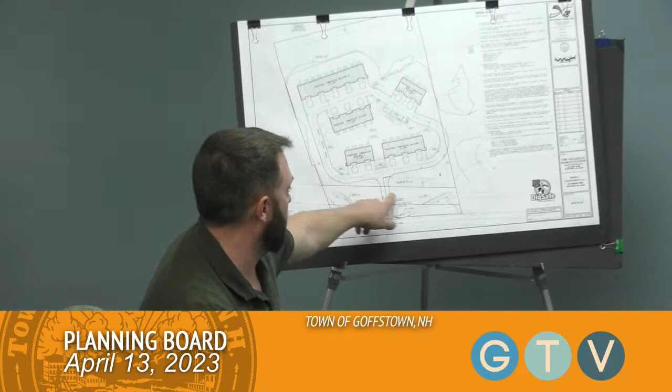It follows right along the side of the existing rail trail. It's a fairly large pipe, 22-inch or 24-inch. There's some debate as to what exactly it is, but we have it measured, and we have the exact inverts on each side, so we know exactly where it is in the ground. This driveway, as it comes in, right now there's an existing driveway to an existing single-family home on the property, and we're in relatively the same vicinity of where we're crossing.

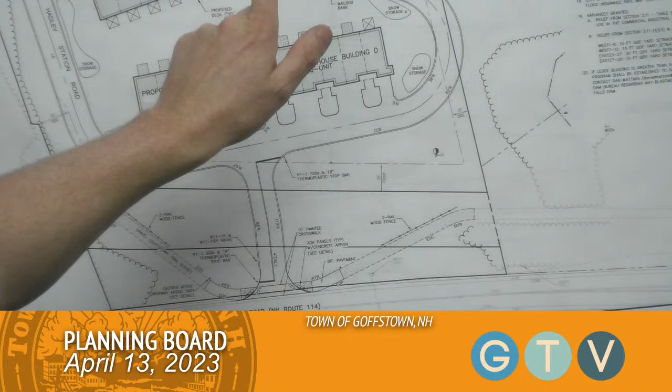However, it doesn't have a platform at the entrance as you typically like to see when approaching a main road, and it is aggressive as it comes up. It comes up quite aggressively, then goes flat across the rail trail, and then continues to climb up into the site. We can't have that transition mid-grade, so we had to make some adjustments.

So what we did is we evaluated the crossing to see what could be done. Just to give a little narrative of where we came from.

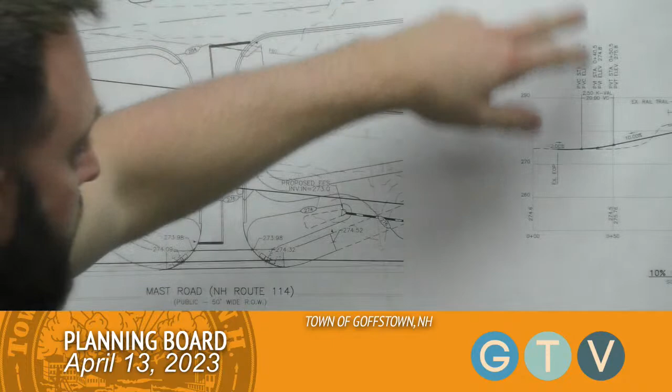What we have here is our proposed access, with two separate road profiles. We have a road profile with a platform at the entrance meeting DOT specifications, and then an 8% grade as required by your design regulations. And then we have one at 10%.

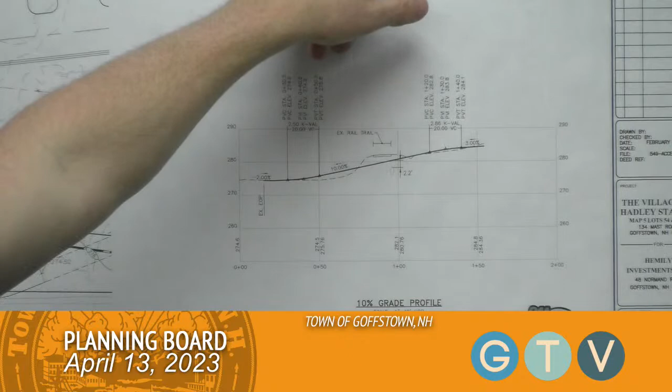What you'll find is that at the most constricting point, since it's a crowned road, at the far edges of the road, at 8% we only have 1.38 feet of cover over the pipe, which is fairly shallow. At 10%, it makes a pretty drastic difference, bumping that worst case scenario to over 2.2 feet.

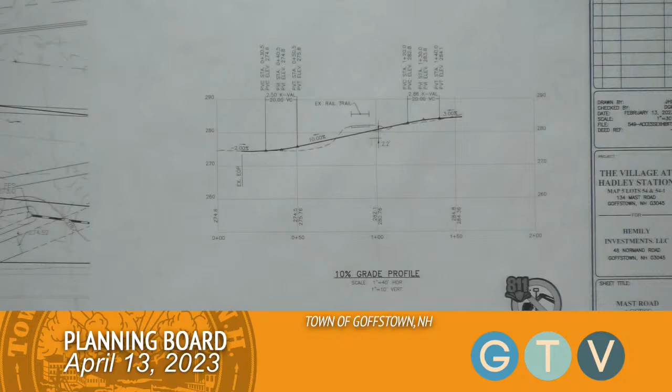What that allows us to do, and this was coordinated with the Sewer Commission and their third-party reviewer, we've come up with a proposal we feel is a safe alternative for allowing that reduced cover. We're not as concerned about the pipe freezing or anything - it's not a cover issue for that reason. We just don't want damage to the pipe.

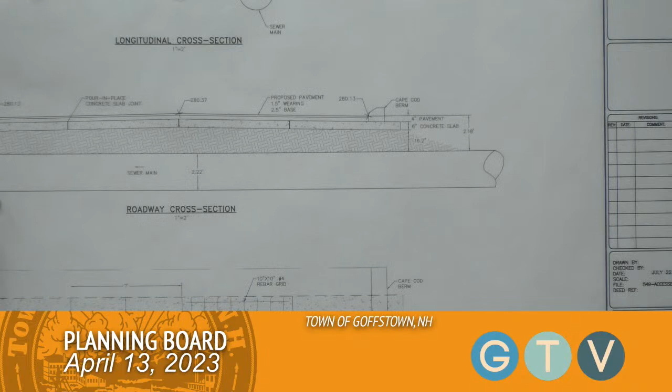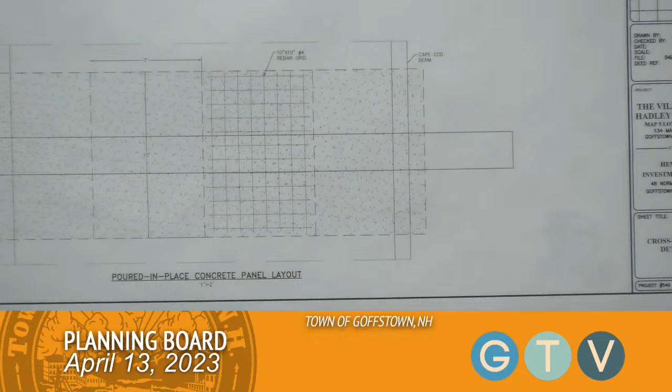So what we're proposing is a concrete slab placed over the crossing area. In layout view, there would be panels of concrete placed on that soil to span where the crossing is and distribute any point load that may come from a truck or anything driving up the driveway, so it doesn't create point impacts along the sewer line.

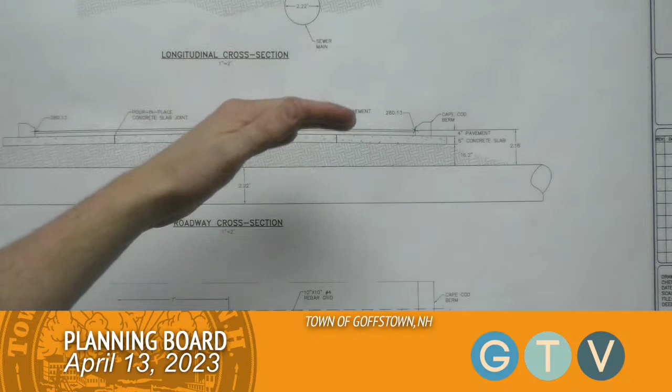At 10%, it allows us enough room to still keep some native soil - roughly 16 inches at the worst case, and upwards of 1.5 feet in better cases along that crossing - and have a 6-inch slab of H20 loaded concrete to span that area.

In reviewing this, we asked could it be done at 8%? I guess potentially, but you'd have a very, very small amount of soil between the concrete and not much room for error. So our thought was that 10% would be a much better design for the crossing.

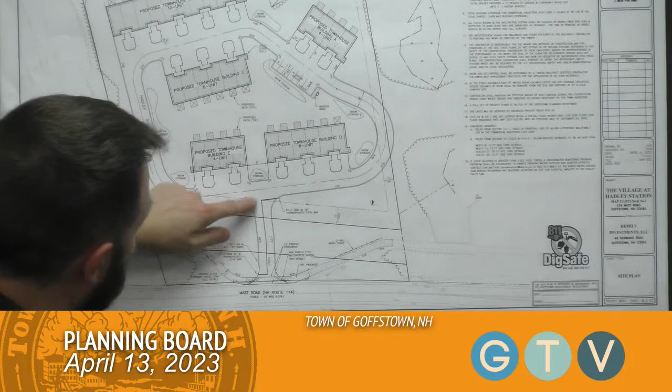We recognized that it was only a small section of the road, about 70 feet of the driveway entrance, because you have transitional curves here. So we're talking about a 10% section that's very small section of the drive. There's no 10% sections elsewhere within the project, nothing more than 8% anywhere inside the project itself.

Just to touch on the rail trail, what we proposed is, instead of trying to cross mid-block where we would be, even at 8%, even under your requirements, that wouldn't meet the ADA cross slope, we brought that connection down to the safest point to cross, which is the intersection of Mast Road and the driveway, and did that in a gradual manner.

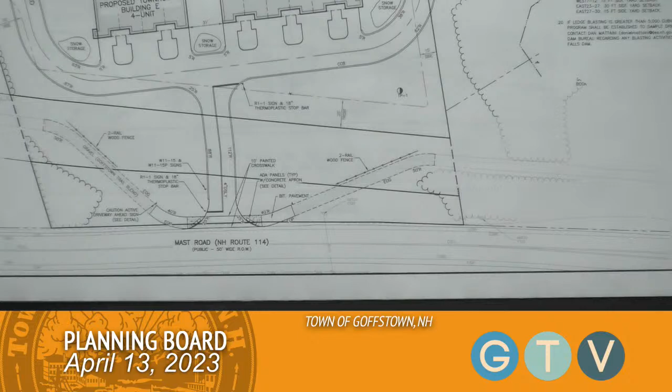This is with feedback from Rail Trail and the Recreation Department and with Scott. And this is fully ADA compliant.

We're doing some voluntary items in addition to what they typically have, which would be extending some pavement so there's a clear transition that you're approaching an intersection from a safety standpoint. This would be a stop condition, striped like a sidewalk or crosswalk, so we felt it was a good option.

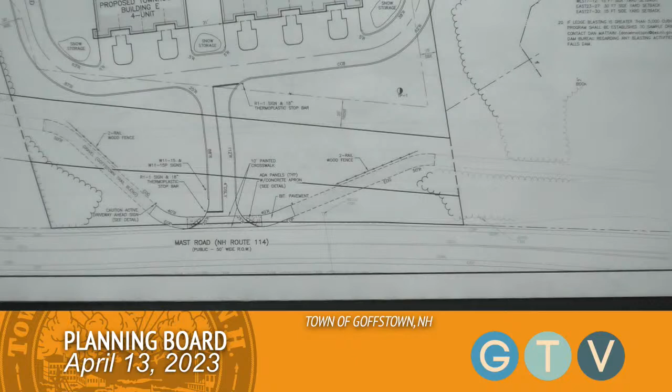So with that being said, the only other item was, as Joanne mentioned, fire - is there any issue from a 10% grade from a fire standpoint? They have no issue with the 10% on the face of it.

However, they want to make sure there are no transitional problems as it transitions from 10 to 2 or whatever. Some of you may recall on the board we had the same question when we looked at Factory Street for an emergency access. That was more extreme, a 16% grade, and we still had it working without an issue with the fire department, but we wanted to make sure we checked that.

So we did a couple graphics for Lieutenant Connor that showed the road, or their biggest engine in profile, as it came down at the tightest points of where it transitioned from 10%.

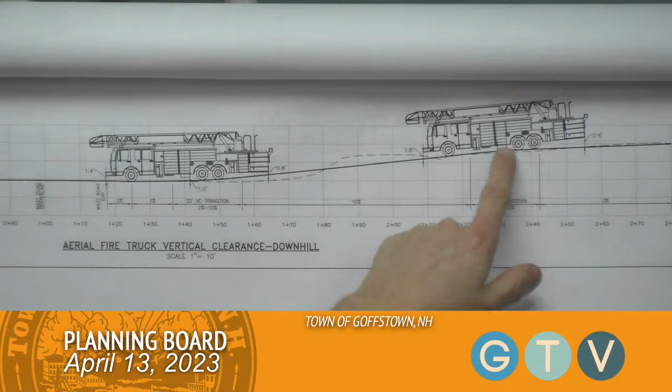You can see 10%, although it sounds aggressive, really isn't that much different at the end of the day. You can see there's no bottoming out issues coming through. Lieutenant Connor has reviewed this over the last couple of weeks and provided an email to Joanne saying he had no issue with the access.

So what we're here for, very specifically, is we recognize you can't act on this application in any more official capacity. We haven't even technically been accepted as complete because we were revising the plan to be accepted. But our goal was, given it was a significant design change considering we have the Tetro Drive access almost completely designed and we're pivoting to this revised access, we wanted to make sure there wasn't anything we were missing that the board members had concerns about.

We were hoping to get some type of a straw poll, an informal vote, or at least hear any concerns you may have with this access, because if you don't have any concerns, we would come back with full design plans with this as the access, recognizing there would be general support for a 10% grade waiver just for this section.

Just so the board's aware, I know this application has been continued a number of times. What we were thinking would be appropriate is, if the board's inclined to support the waiver, we would ask to be continued, but not to a date certain, and we would request that we re-notify the abutters of when we came back.

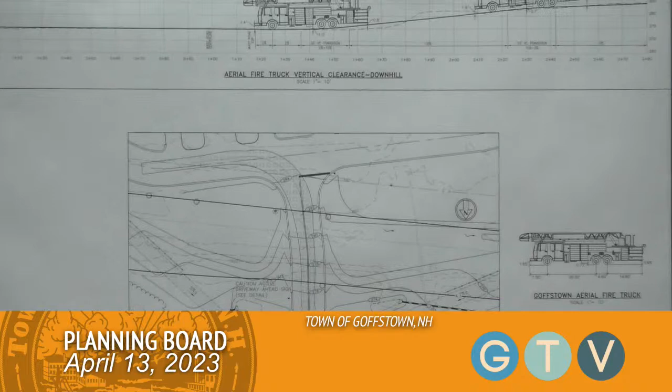What that will do is, I mean, we hope to be done in 30 days. I just don't want to have to come back and keep pushing abutters forward if anybody's watching. I'd like to be able to work with Scott on the revised plans, get him good before we came back. So that would be our intent, but we'd like to hear what the board's thoughts are on the access.

David, could you please enlighten everyone as to what the sewer commissioners were thinking about the cover issue? Either one of us can do it, but I'll have you do it.

Doug showed five panels of concrete over the sewer line, and the sewer commission approved that concept. We had your engineering plans reviewed by our consultant with the sewer department, and he concurred that the strength of the concrete was adequate to disperse the weight. We also thought the 10% grade was a better plan because it provided more cover over the sewer line.

For those of you who don't know what the sewer line is, it is the interceptor line, the main line that pumps all the wastewater from the village to Manchester. So if that line was ever damaged or put out of service, we would have a big problem in Goffstown.

Joanne's rationale here, the reason for the change, is to allow the sewer pipe to remain at the height shown. We have no choice. That entire pipe, for a half-mile long, is gravity fed, so there's no moving the elevation of the sewer line. It's all set up on a grade. Just so everybody knows, the sewer commission was on board with the presentation.

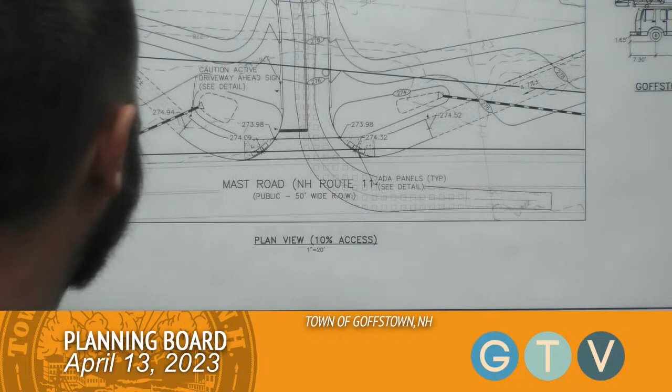So we're at 2% all the way down into the low point, which is past the rail trail walk. We're actually coming down into the site for a fair amount before coming back up. So we're down at 2% here, then transitioning back up, and then we have a 20-foot curve which goes from 2% to 10%.

So we don't have it as 100 feet, which is something I should double check in the regulations. I don't think we ever had, or really could have, a 100-foot platform, and I don't know if that's just for standard public town roadways, or if it would pertain to a private site driveway. Well, it is a roadway design standard throughout because it's multifamily, so you would have to conform.

So where are we in our development regulations? What page are we? Page 44, the road design standards. So the maximum grade within 100 feet of the intersection is 2%.

So based on that, waiving it to be 10%... I think what we would ask for the waiver, and the way I would couch that, is that those standards, and there's many of them in that section, regarding centerline curves, are really intended for a town roadway standard, for a publicly accepted road. I recognize the regulations don't differentiate for a private road.

Joanne and I talked about this, and I don't disagree with you, Joanne, but I look at this as a site driveway. However, the regulations define a driveway as a residential driveway of 3 or fewer units. So the only other definition would be roadway, but there really should be something in between a residential driveway 12 feet wide and a town road.

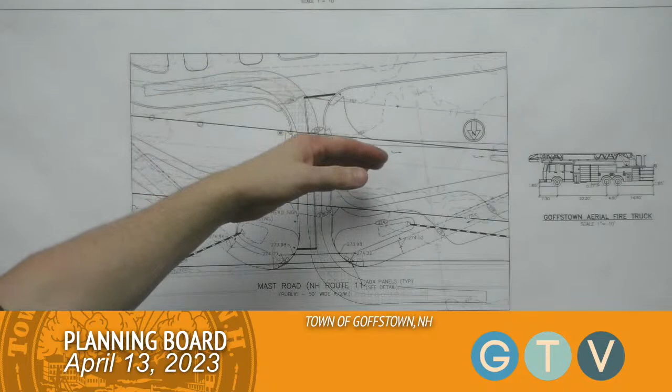One, this is intended to be a private residential development, and bringing the rail trail access directly into the middle of the site could potentially cause liability concerns for the owners, because you're basically bringing in the public right to the access—do they want to walk around the loop and get a little extra workout or something?

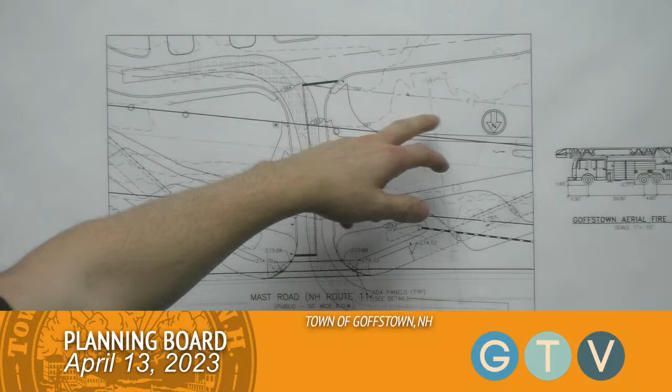Also, this land, which is all owned by the applicant, is being utilized for drainage. It's a good logical point, and you'd have to be infringing on that to pull it up there.

Also, in my experience with other pieces of the rail trail in the community, you cross roads many times, and it seems safest to cross at the intersection of the road where you have the best visibility and sight distance. People aren't necessarily going to expect someone up here as they're wrapping in or coming from Mast Road, but you'll be stopped here on Mast Road, you'll see people, coming to a stop condition before you reach the access.

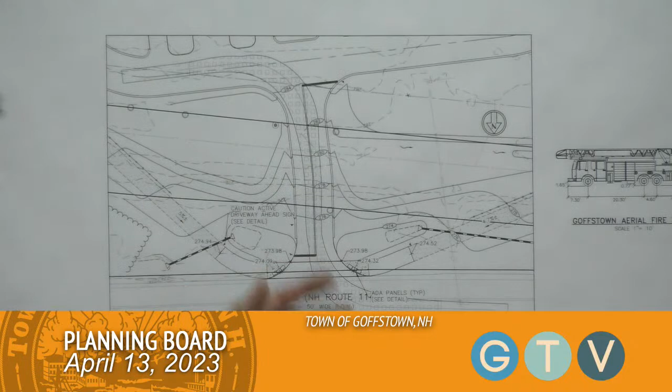So, for those reasons, that's why we put it there, and to be honest, as long as it meets all the design intent, it makes sense to be put either way.

One final comment. I agree on public safety, and I think that rail trail is a little too close to Mast Road. That's just my final comment. I'm here as a visitor and guest tonight. I think up would be better than down.

Other board members? Okay, it's a quiet crowd. Can I ask the board one question?

You sure can. We had talked about the possibility of installing sidewalks here so that school-aged children could walk on a sidewalk down to the intersection before the bus pickup. Could we talk about that now, whether you'd be looking for that while he's doing his design so he could include it or not?

Are there sidewalks within the project? No. So any pedestrian traffic would be in the roadway? Yes, and this is intended to be a low volume, low traffic area. The throat access we're talking about is only 70 feet long.

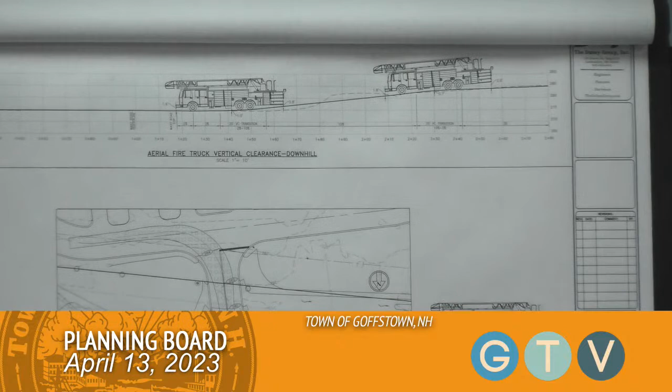So on your cross-section for the fire engine at the top, you said it comes down from the state highway at a grade of 2% down, correct? And then it runs flat for a portion, and then begins a 2% incline for a short period - so essentially yes. Show me where the end of the 2% is as you're inbound.

Where does the 2% end going into the project? Front or rear wheel? Right here. Now, is that where the rail trail crossing is proposed to be, at the farthest inboard point from Mast Road? The rail trail crossing is actually to the front.

What - if to address the comments from our select board rep, if you were to bring it in closer, does that work or not? It doesn't work, because the goal was - this gets more into the details with Scott, but he'll understand what I'm talking about.

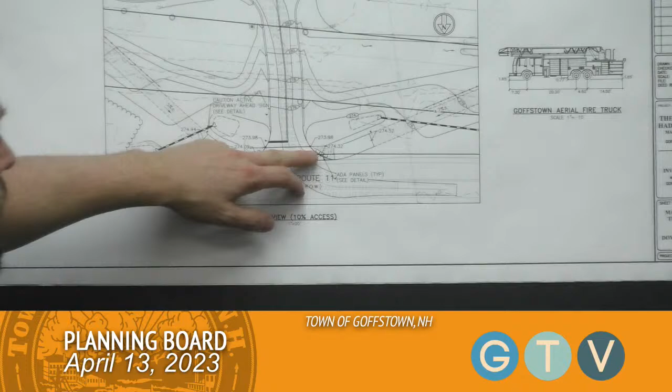We wanted the water coming down to not sheet across or pool at the connections of the rail trail at the bottom. So what we have here is water coming in at 2% down all the way to the back of the curb. Now if we continued that 2% down even further in, it would put the driveway even lower and cause issues with the sewer.

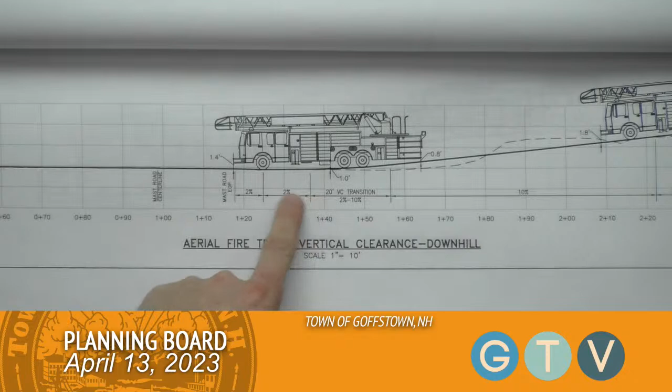So we went 2% down for about 10 feet into the site, then transitioned to 2% up for a fair amount more. At station 135, we have at least a good car length plus of no more than 2%, then transitioning up from that, and that transition happens over this vertical curve here.

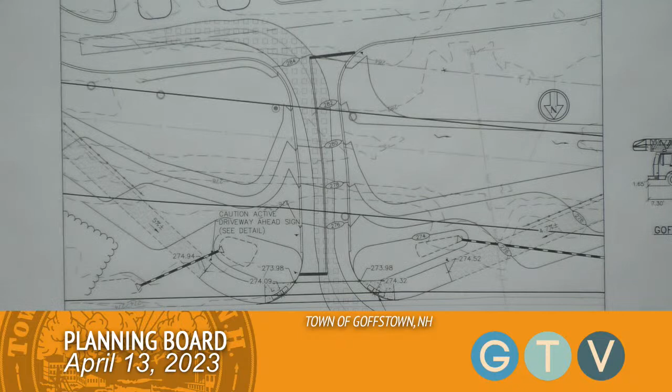Right, so we could not push this further in, because all the water naturally coming down in these pockets would have to drain over the rail trail, and we're trying to avoid that. We were collecting it on the insides and piping it out - I didn't get into those details right now, but that's the intent. And how close, in your plan, is the rail trail to the edge of Mast Road at its closest point?

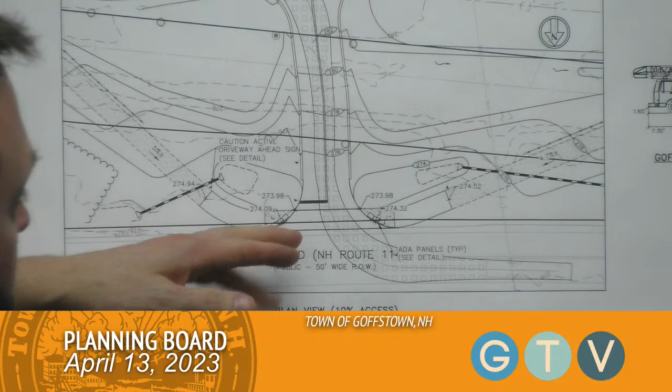Is it 10 feet in? What's the number? So essentially, what we're doing is intending for this to be at the intersection crossing. There's a 4-foot paved shoulder on Mast Road, and that's the start of the first crossbar of paint, and then there's a 10-foot wide access crossing over.

I can respect the comment about safety, but there's many places where the rail trail actually crosses across Mast Road. This is a very visible crossing, and you want to have that as close as possible. What we don't want is if we push anything further in, you're essentially getting a mid-block crossing, even if it's 10 feet in, because the car has to stop and then pull forward and stop again. What we're doing here is they get to a stop condition as their only stop, and then they can edge forward to pull out.

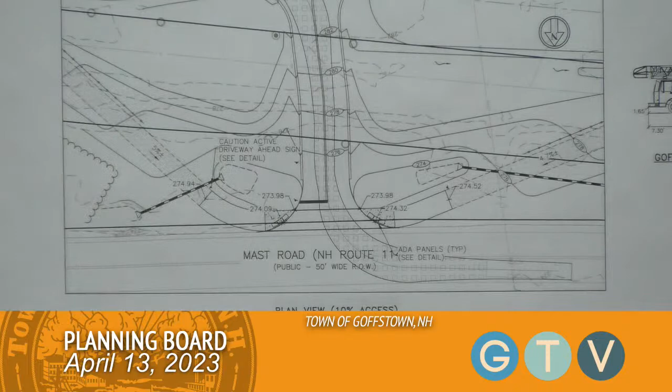Questions from anybody else?

Colleen: to Joanne's point about sidewalks, whether it's a sidewalk or a trail off the side of the road, I think at the very least something on that throat, getting them down, if you're going to have kids walking to a bus stop there. I wouldn't necessarily say sidewalks throughout the entire site, but at least something on that throat to get kids out of the roadway. The reason I say sidewalks is because if it's just a grassy or gravel area off the side, what happens when it snows? Hopefully the sidewalks would be maintained in snowy weather.

Okay. Barbie, have anything?

Okay everyone, does anyone have any questions for the applicant? So what we'll do is talk about individual elements that they've asked us to address, and we'll take a straw vote on how people feel about it. First thing is the 10% grade for this portion of the road where it enters the property. It's been described. Does anyone have an opposition to the 10% grade at this time?

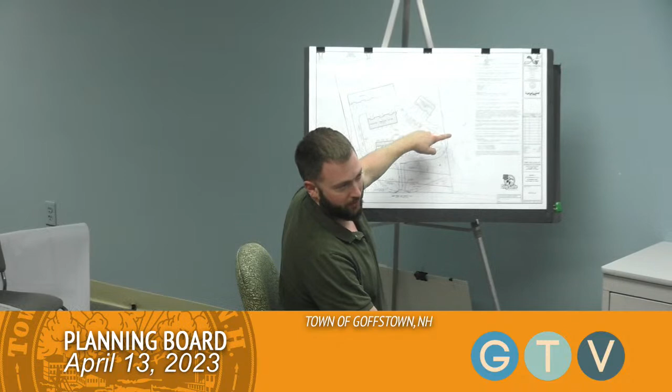This property has legal access from the cul-de-sac of Tatro Drive all the way through here. You can see this cut tree line, that's remnants of our previous proposal. There's a cell tower that goes up the top here. Our proposal originally, fully designed, was a driveway coming from the parking lot of the office building, upgrading the gravel portion of the access coming up through here to a paved access drive all the way in, making this the primary access point.

What happened is there was concern raised from a few different angles. One, abutters from the condominium association that owns the office building were concerned about cars driving through their parking lot, which legally was allowed. We had an easement to do so, but I can understand their concern about people coming out of the building not paying attention, it was a safety concern. There were also concerns that if a child was trying to get the bus, were they walking all the way down to Tatro, and how was that going to be handled, and whether we were going to make other adjustments for that reason.

So, when we came that first time, many of these things were discussed, and we had proposed it that way because at the time, the applicant on previous proposals looked at on this property was under the impression that DOT would not support an access connection to Mast Road. We met with DOT, Brian DeFosis, right on site, and he did not have concerns with the access point. It was far enough away from the Tatro Drive connection.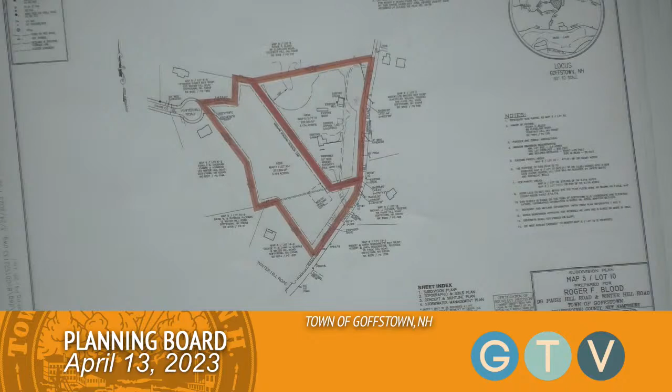The first lot is the one that has the farmhouse on it already. As Joanne said, it's over 10 acres, almost 11. I want to make the point off the bat that clearly we're not trying to maximize development of this lot. They're going to be both over 5 acres.

We're in a zoning that has 2 acre zoning, with, I believe, 200 feet of frontage required. We've got over 1,000 feet of frontage, so theoretically they might be able to get 5 lots, but it's a simple subdivision. We're utilizing a stone wall that's existing.

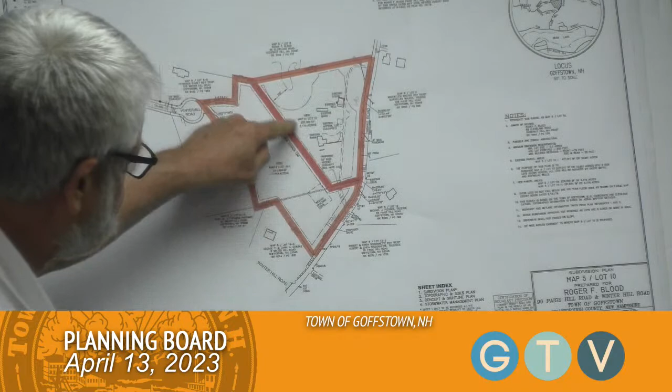You might say, why does it have a little bit of a funny shape up front? The reason is, this is kind of... will that read me from here? Am I okay? So you have the existing real estate here and farm from days gone by, and this is kind of the loop road that came up through.

We've got a wall here, and the existing field comes down to it, so this makes a good delineation for whoever buys this. You own up to that wall, and we always try to use stone walls when we can. So that's the first point, that you've got the greater than 5 acre lots, and then the key thing was just to prove out viability.

So we've shown a conceptual house. Keep in mind, all Mr. Blood is trying to do is make this a viable lot. He doesn't have a house design, doesn't have a building permit waiting to go in or anything like that. But I think we've gone through the exercise to show this has ample room to support a house.

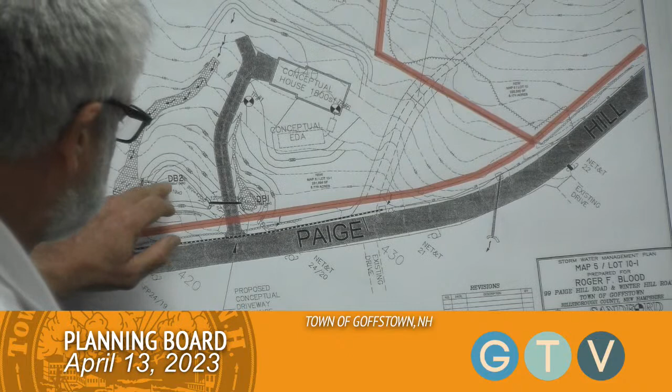We've done test pits to show that a septic system would be viable. And then to control any drainage that would be created, we went through a process to analyze the impervious area from the house and a proposed driveway. We've shown a bigger basin here and a smaller basin here.

And if you've been on the board for a while, this is almost identical to what we did for the Noble subdivision 2 or 3 years ago, for whoever's here during that. But there again, I know there's some technical questions, and the key in my note is that this is conceptual.

It's tough for me as an engineer, we have to use our imagination as to what's going to happen. And to me, the best strategy is to say, okay, it's viable, but when he's going to go for a building permit, he needs to come back with something that uses real data, because I'm pulling this out of the sky. I don't think it's right for him to be required to do it as if it's one and done. We're looking for that flexibility, especially with the oversized lot.

But I've gone through all the comments. The only thing was to what degree we're going to want the sizing of the riprap and some of the stuff that I would like to kick down the road, because we're not at that point of finalizing.

Again, it's based on a concept that may prove to be not at all what goes in there. This may be a vacant lot for the next 10 years, who knows? But that's up to the board. Nothing in there would stop this from going forward.

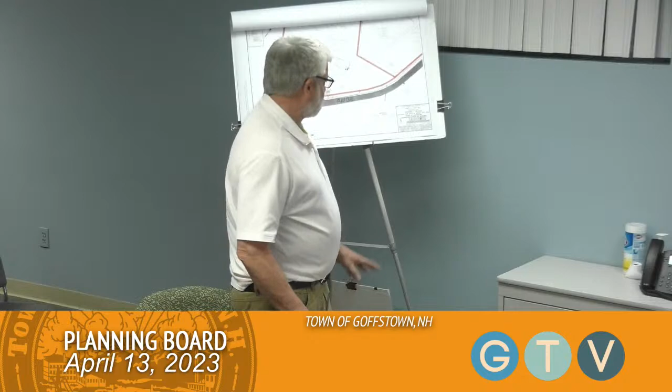It's just more time and money if we have to do more technical engineering on the drainage system. I've shown it with my 40 years of experience that this will work, and I've built dozens or more of them, so mechanisms to control drainage and prevent the post-development flow from being an increase over the pre-development flows.

That's probably getting too technical, but to prove that out, we also did a sight check to make sure there were sight lines, and the driveway location is shown where we can get the sight distance required. We're showing, conceptually, an 18-foot platform, which the town's regs call for: 9 feet at 2%, and then up. We put it in as an 18-foot platform with a note on the previous page that it has to conform with the Town of Goffstown's standard detail.

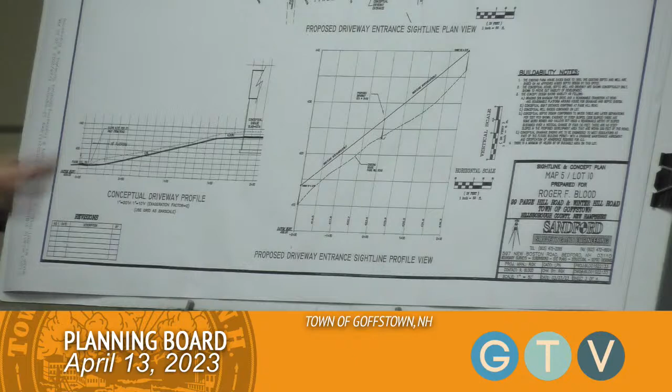Yes, we can bring that detail forward and put it on the plan, but again, I'm just appealing for simplicity. That's in no way us trying to shirk the rules as they're written.

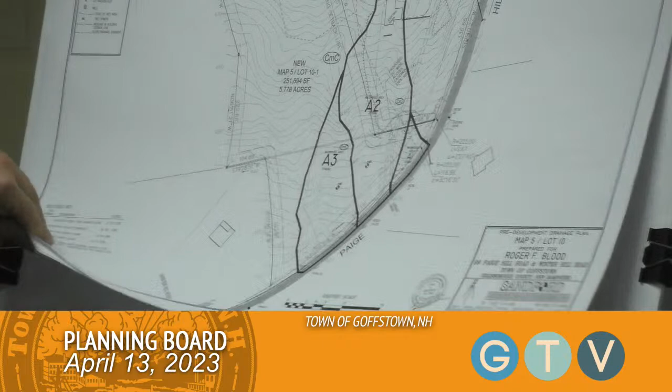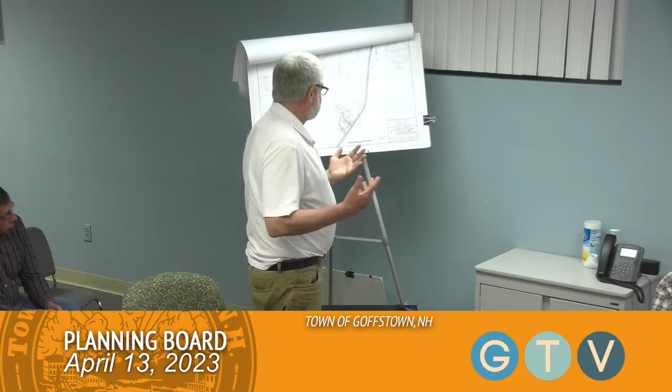So we've got the driveway profile, we've got the sight distance proved out, and this shows the drainage watershed areas that are influenced. This is as it stands right now. We've broken it into 3 drainage areas, and when we put the conceptual house in, we rerouted some drainage and made it all work so that we've mitigated the impervious surfaces that would result from a conceptual design, with the appeal that some leniency be given now.

With the understanding that when something comes in as part of a septic design, which is how we're doing them in New Boston, as part of a septic design or companion to it at the building permit, then at the septic design we know what's going in for a house. So we're finally getting some meaningful numbers, how wide the house is, and so if there's a mechanism to make that part of a building permit requirement.

But I don't know how all the politics work on that. I'm just giving this as... I always feel queasy trying to say what's going to go in when I have no idea. Again, there's nothing prohibitive in the comments. As Joanne's last comment was, it could be approved with conditions, and that's what we would hope for. But we're at the mercy of the board.

Thank you. Thank you, sir.

Board members? Barbara? This is ag, right? So 2-acre zoning, what's the frontage requirement? 200 feet. So what do the 2 lots have? One has 440 and one has around 640.

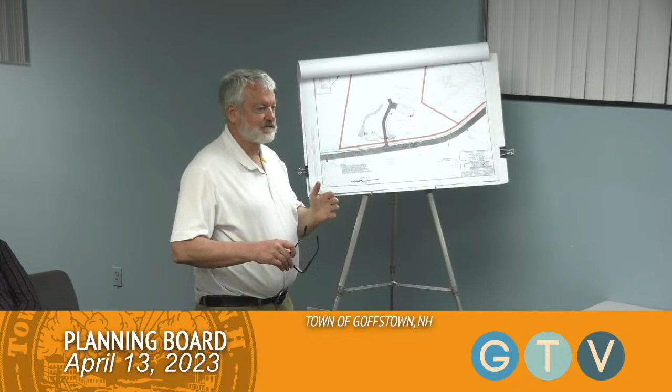If you take some, where these contours go close together, there are some on this lot, but there's so much flatter land that we didn't include that. So there's sufficient buildable area without it.

Absolutely, yes. And hence not using the Winter Hill access because of the steep slopes on the top? Because I see you have an access to Winter Hill with this proposed lot, correct?

Yes, but we're not proposing that at this time, but if someone bought the lot and wanted to go that direction, that's part of trying to guess what someone would do. But yes, there's 55 feet of frontage on Winter Hill.

So, for clarification, there's really no coming back though. If someone decided they want their access off Winter Hill, do they come back to the planning board, or just go get a building permit and driveway permit? Once it's deemed a buildable lot, if it meets the standards, we don't ever see it again.

So we may decide after we speak that we will change this and add the frontage to the main lot, like you're suggesting. But if we can just postpone it for this time and come back.

Would you like to discuss this with your client in the hallway for a minute? Please, go ahead. If this does get continued, we'll give you 5 minutes. We'll just sit here and relax for 5 minutes.

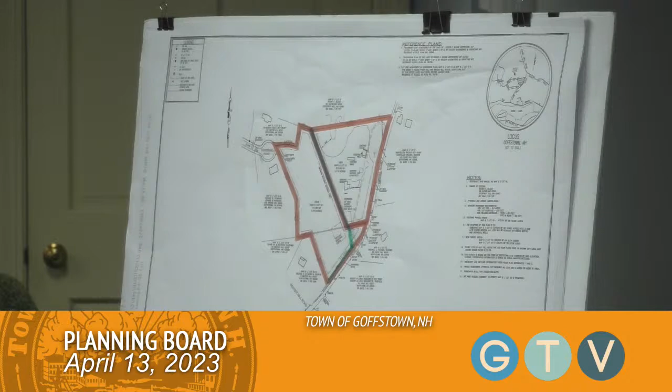So, yeah, that was, what was the other one? I've got it, they're in our packet. I'm trying to find it. Wetlands delineation, soils and wetlands. Soil, wetland stamps, and wetlands delineation. Yes, okay. So, you're a wetland scientist. I'm willing. Oh, there you go. But it would take quite a bit of money to do 10 acres.

That's true, and it doesn't affect the application. Right, unless they want to build on the top later, then they'll have to flag the wetlands on the top. Well, I think those are, that's, yeah. They were delineated up there, so. But just to follow up on that, I don't have an issue with it for this application, but when something comes in, I don't want it to be a blanket waiver for anything in the future on this lot. We would make that condition. So that would have to be a condition, that the waiver is for purposes of this subdivision only.

We're going to start again, and we're going to open the public hearing. A septic design requires it too, for keeping the distance. You're welcome to the septic. Okay.

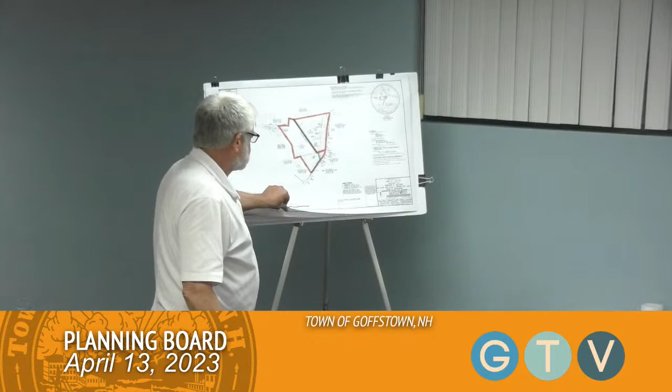All right, so what did you guys talk about in the hallway? Mr. Chairman, we have a solution, exactly what we said. The green line, we'll bring it down to the edge of the road, and it'll be a minor change to this plan. I'm hoping it could be one that you could conditionally approve, and staff could say yes, it meets what we discussed. Like I said, the frontage would still be fine. Yeah, it's front, just scaling it and they'll still have it. If we were to draw it on this plan, it would be...

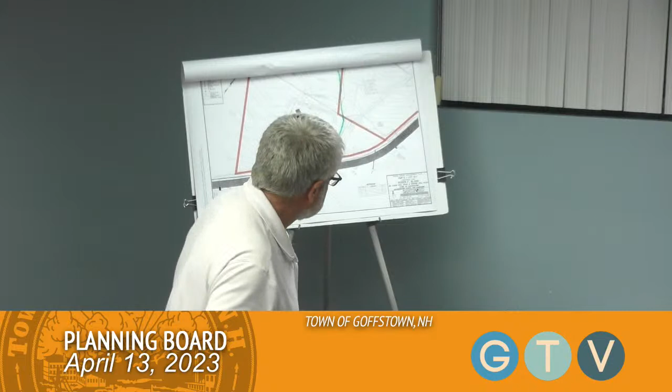There's ample area. So Earl, if you move that line down, would you continue to keep that extra driveway? Yes. Okay. As long as you have the whole point. And you'd have to ask for a waiver for the separation from the property line of 10 feet, unless you allowed for 10 feet from the edge of the driveway to the property line.

Can I request, Earl? No, I'm not sure I understand. The new line you want to draw, unless it's 10 feet from the existing driveway that you want to maintain, you'd have to ask for a waiver for the property line being too close to the driveway.

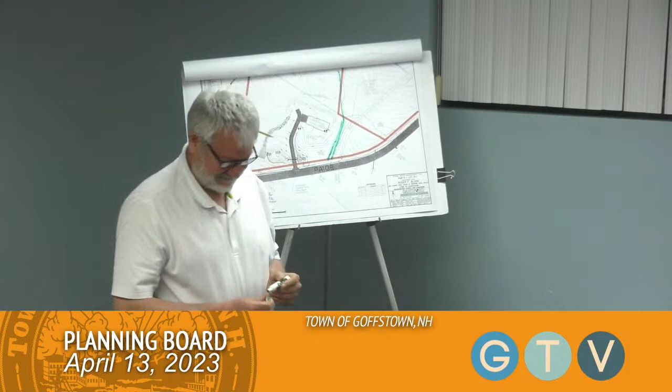We got so much room, so 10 feet's fine. As long as you draw it so that you have 10 feet, then you don't have to ask for the waiver. Thank you. Okay, so this would be easy. That was we would have administratively handled this with Scott and Joanne. All right, folks, well, let's talk about the two waivers.

The first waiver is for the development, soils and wetlands stamps. Could you explain why you want a waiver for that, Mr. Sanford? It's such large acreage, and within the 2 acres close to the road, which is a minimal lot, there's no wetlands, and we've looked at that.

And the wetlands delineation is the other waiver you're asking for. Yeah, it's kind of both the same. Okay. And you understand that if those waivers were granted, it would be conditioned that those waivers are only good for the plan as you show it.

Any other possible use of the lot from the upper side would require that these waivers be null and void, and you would have to return with wetlands. Well, or they could request a waiver again. The waivers are not in perpetuity for the whole lot, they're only for the conceptual house as shown.

So if you get a building permit, I think the house is in the front portion of the lot as depicted on the conceptual plan. That's right. My only question would be, wherever they put the house and the septic, it's got to go through a wetland within 75 feet of the area, and that'll have to be redone even when this is built.